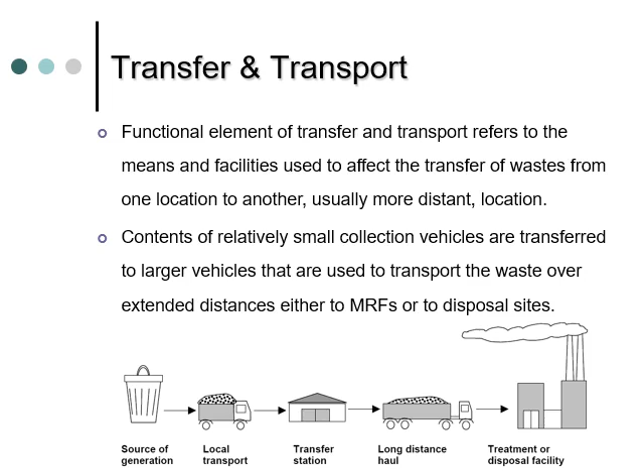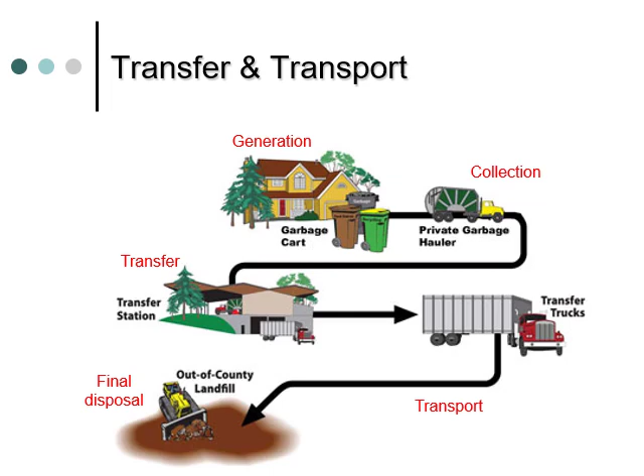In the slide, you see a flow diagram showing the elements of integrated solid waste management system. As you see here, the transfer and transport operations are between the collection and final disposal steps. Transfer and transport operations are also used in conjunction with material recovery facilities to transport recovered materials to markets or waste-to-energy facilities and to transport residual materials to landfills.

Today, with rising labor, operating and fuel costs, and the absence of nearby solid waste disposal sites, transfer stations are becoming common.

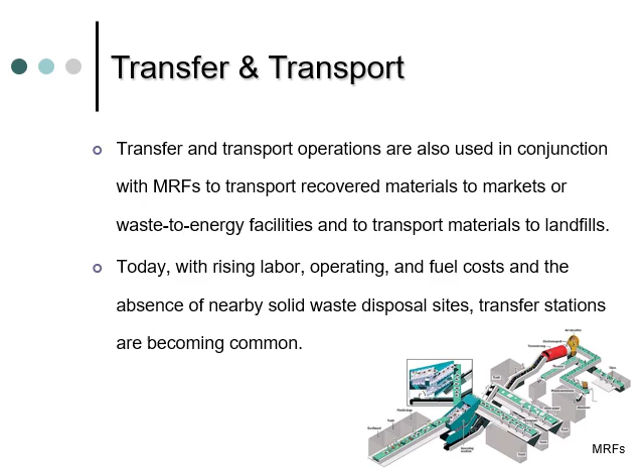Now let's try to find the answer of the question, why do we need for transfer operations? Transfer and transport operations become a necessity when haul distances to available processing centers or disposal sites increase, so that direct hauling is no longer economically feasible. They also become a necessity when processing centers or disposal sites are sited in remote locations and cannot be reached directly by highway.

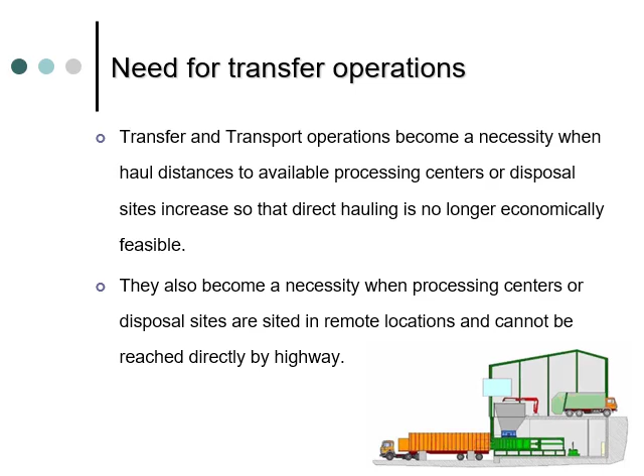Now let me tell you some of the factors that tend to make the use of transfer operations attractive. Occurrence of illegal dumping due to excessive haul distances, location of disposal sites relatively far from collection routes, use of small capacity collection vehicles, existence of low-density residential service areas, use of a hauled container system with relatively small containers for collection of waste from commercial sources, and use of hydraulic or pneumatic collection systems.

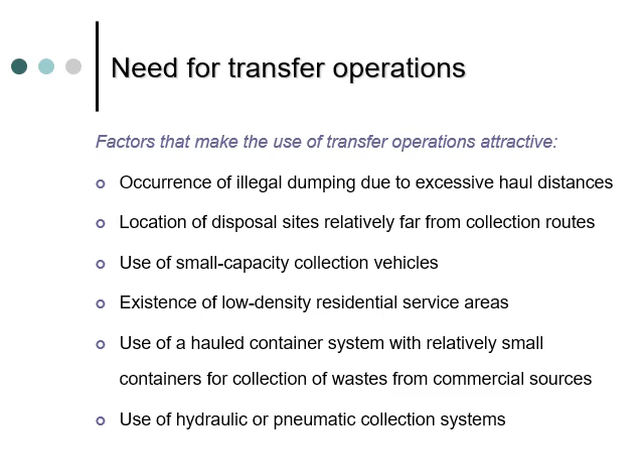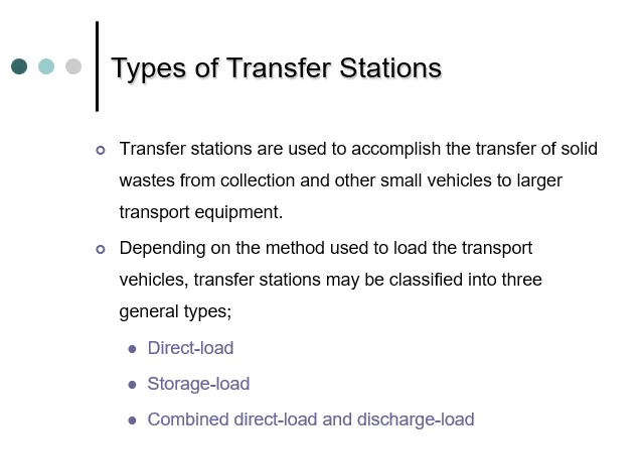Transfer stations are used to accomplish transfer of solid waste from collection and other small vehicles to larger transport equipment. Depending on the method used to load the transport vehicles, transfer stations may be classified into three general types. The first type is direct load, the second one is storage load, and the last one is the combined direct load and discharge load.

In some cases, the waste may be emptied onto an unloading platform and then pushed into the transfer vehicles after recyclable materials have been removed. The volume of waste that can be stored temporarily on the unloading platform is often defined as the surge capacity or the emergency storage capacity of the station.

In the storage load transfer station, waste are emptied directly into a storage pit from which they are loaded into transport vehicles by various types of auxiliary equipment. The difference between a direct load and a storage load transfer station is that the latter is designed with a capacity to store waste, typically 1 to 3 days.

In some transfer stations, both direct load and discharge load methods are used. Usually, these are multi-purpose facilities that service a broader range of users than a single-purpose facility. A multi-purpose transfer station can also house a materials recovery operation.

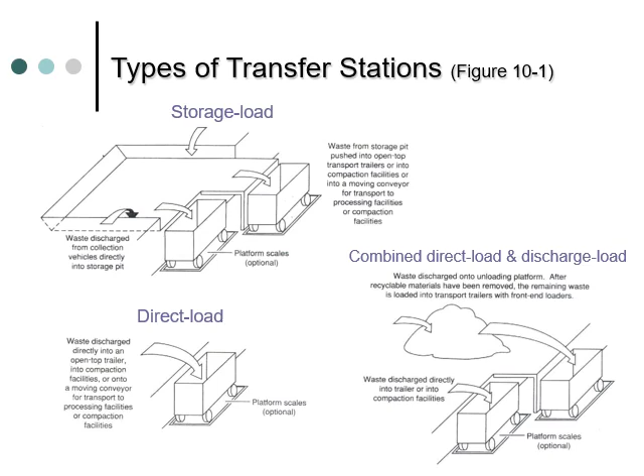In a large capacity direct load transfer station, the wastes in the collection vehicles usually are emptied directly into the transport vehicle. To accomplish this, these transfer stations usually are constructed in a two-level arrangement. The unloading dock or platform from which the waste from collection vehicles are discharged into the transport trailers can be elevated, or the transport trailers can be located in a depressed ramp.

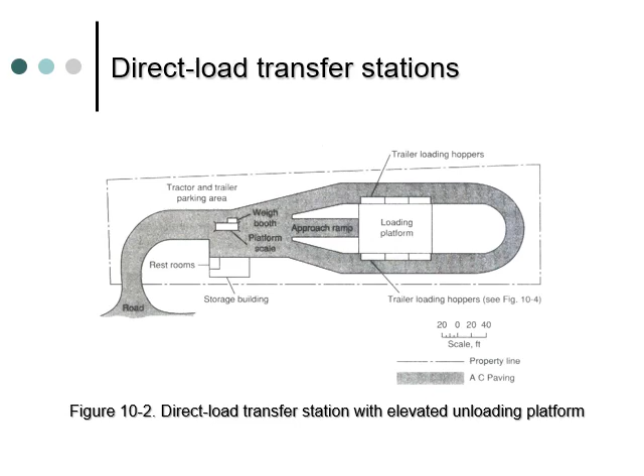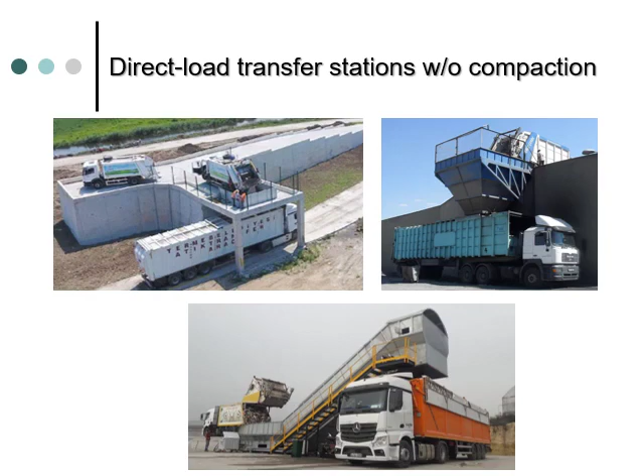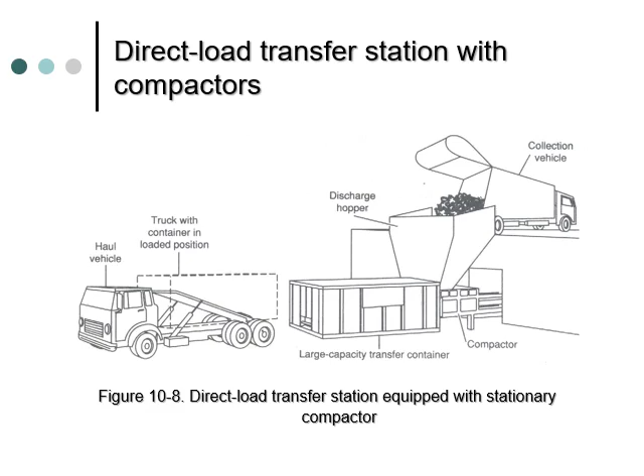A small capacity direct load transfer station with compaction facilities is shown. A large container is used with this type of transfer station, as opposed to a transfer trailer. The container is hauled to the disposal site using a tilt frame vehicle. Depending on the length of time required to haul the loaded container and return, an empty container may be attached to the compactor before the full container is hauled away.

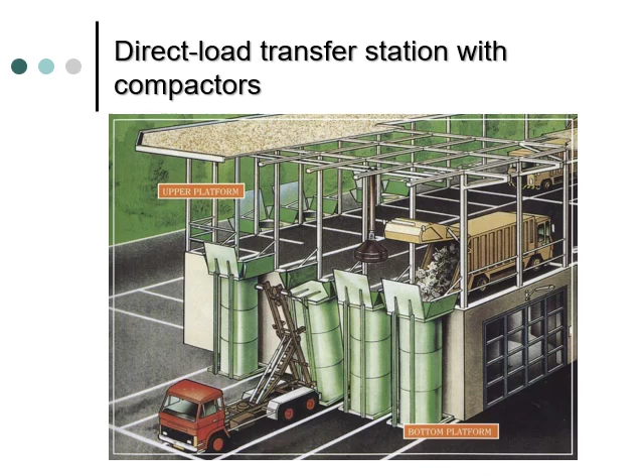In the slide, you can see an example of large capacity direct load transfer stations with compactors. The compaction facilities can be used to compact waste directly into the transfer trailers. The operation is essentially the same as a direct load transfer station with open trailers, except that waste is compacted into large transfer trailers using stationary compactors. In some cases, the waste is conveyed to the compaction facilities.

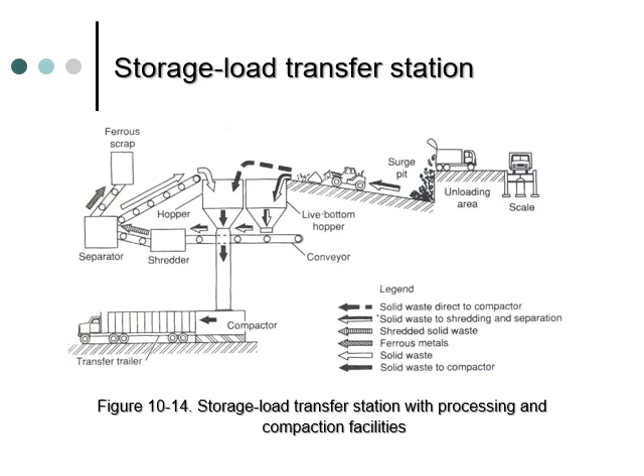Now let me talk about transport means and methods. Motor vehicles, railroads, and ocean-going vessels are the principal means now used to transport solid wastes. Pneumatic and hydraulic systems have also been used. Where the point of final disposition can be reached by motor vehicles, the most common means to transport solid waste from transfer stations are trailers, semi-trailers, and compactors. All types of vehicles can be used in conjunction with other types of transfer stations.

In general, vehicles used for hauling on highways should satisfy the following requirements: waste must be transported at minimum cost, waste must be covered during the whole operation, vehicles must be designed for highway traffic, vehicle capacity must be such that allowable weight limits are not exceeded, and methods used for unloading must be simple and dependable.

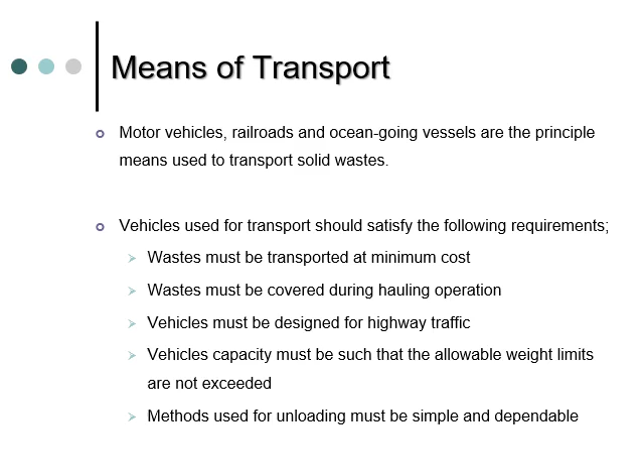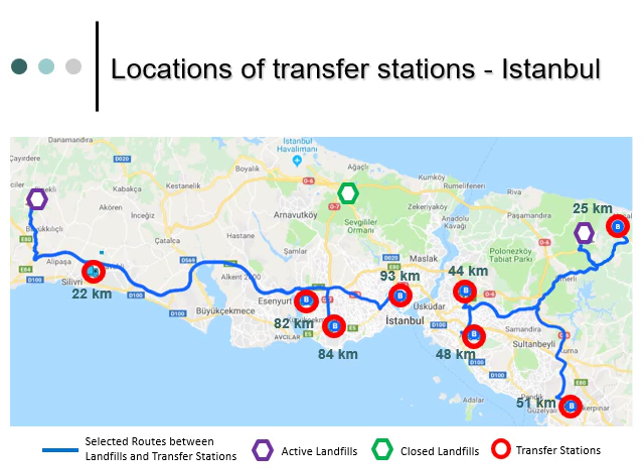There are two active municipal solid waste landfills. The one in the Anatolian side is Kömürcüoda landfill, and the other one in the European side is in Silivri. The landfill in Odayeri was closed after about 25 years of operation, following the construction of the new airport close to it, last year.

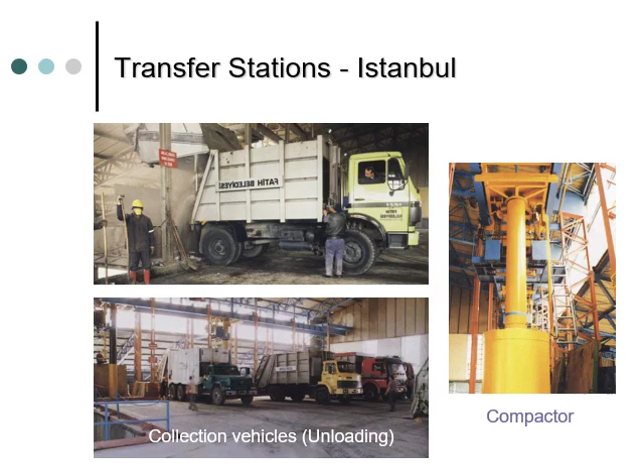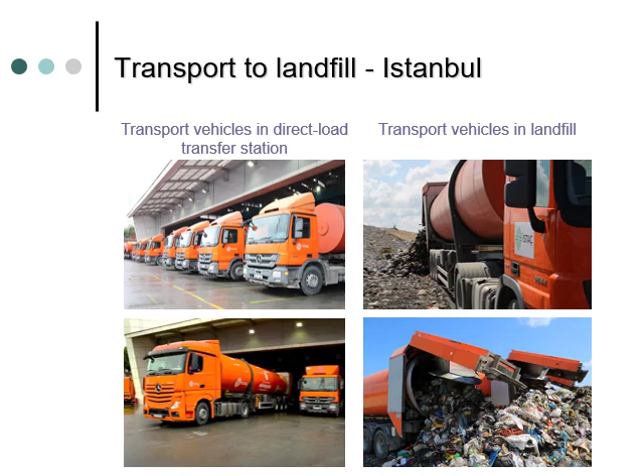Is a transfer station appropriate for your community? This is one of the crucial questions that local authorities look for, and the answer can only be given by comparing the costs and savings associated with the construction and operation of the transfer station. By the way, the benefits and possible drawbacks should also be considered.

What are the expected benefits? Lower collection costs, reduced fuel and maintenance costs for collection vehicles, increased flexibility in selecting disposal facilities, the option to separate and recover recyclables or compostables at the transfer site, and the opportunity to shred or bale wastes before disposal.

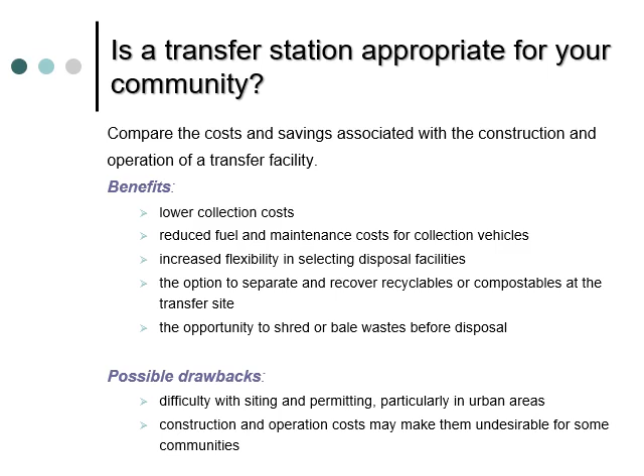What about the possible drawbacks? Difficulty with siting and permitting, particularly in urban areas, and construction and operation costs may make them undesirable for some communities.

Although specific details vary with size, important factors that must be considered in the design of transfer stations include the type of transfer operation to be used, storage and throughput capacity requirements, equipment and accessory requirements, and sanitation requirements.

From a design standpoint, the key issue is whether waste recovery operations will be incorporated into the transfer station facility. If waste recovery is to be accomplished at the transfer station, then an adequate area must be available for the collection vehicles to unload.

Both the throughput and storage capacity requirements must be evaluated carefully in planning and designing transfer facilities. The throughput capacity of a transfer station must be such that the collection vehicles do not have to wait too long to unload. In most cases, it will not be cost-effective to design the station to handle the ultimate peak number of hourly loads. Ideally, an economic trade-off analysis should be made.

For example, for both types of transfer stations, the annual cost of the time spent by collection vehicles waiting to unload must be traded off against the incremental annual cost of a transfer station and/or the use of more transport equipment.

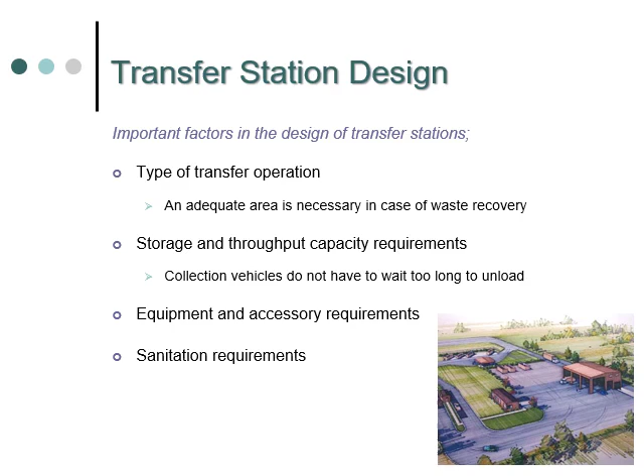Whenever possible, transfer stations should be located as near as possible to the weight center of the individual solid waste production areas to be served, within easy access of major arterial highway routes as well as near secondary or supplemental means of transportation, where there will be a minimum of public and environmental objection to the transfer operations.

Construction and operation will be most economical. Additionally, if the transfer station site is to be used for processing operations involving materials recovery and/or energy production, the requirements for those operations must also be assessed. In some cases, these latter requirements may be controlling.

Under ideal conditions, the transfer stations should be located so as to minimize transportation costs. However, given the difficulty most waste management agencies have had in recent times in locating transfer stations, transportation costs have become somewhat less important in the selection of an appropriate location of a transfer station.

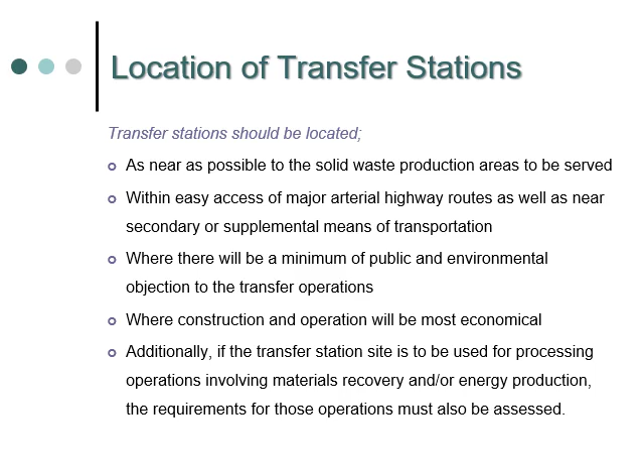Hereafter, I will talk about the solution of 3 examples about transfer and transport operations from our textbook. The first example is about the economic comparison of transport alternatives.

The question asks to determine, based on operating cost, the break-even points for a hauled and a stationary container system as compared with a system using transfer and transport operations for transporting waste collected from a metropolitan area to a landfill disposal site. The following operating cost data are applicable.

Haul container system using a hoist truck with a 6 meter cube container is $25 per hour. Stationary container system using a 15 meter cube compactor is $40 per hour. Tractor unit with a capacity of 80 meter cube is $40 per hour.

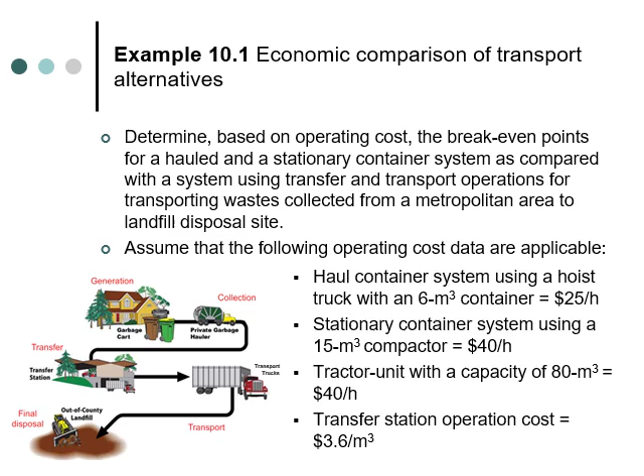Transfer station operating cost is $3.6 per meter cube. Here is the solution of this example.

First, let's convert the cost data to units of dollars per cubic meter per minute. For the hoist truck, it is calculated by dividing the cost data of the hoist truck, which is $25 per hour, by 6 meter cube, which is the capacity of the hoist container, and converting this value to minutes by dividing by 60 minutes per hour. The result is $0.0694 per meter cube per minute.

For the collection vehicle with compactor, it is calculated by dividing the cost data, which is $40 per hour, by 15 meter cube, the capacity of this vehicle, and converting this value to minutes by dividing by 60 minutes per hour. The result is $0.0444 per meter cube per minute.

Finally, the same calculation is done for the transport truck, by dividing the $40 per hour cost data by 80 meter cube, the capacity of this vehicle, and converting that data to minutes by dividing by 60 minutes per hour. The result is 0.0083 dollars per meter cube per minute.

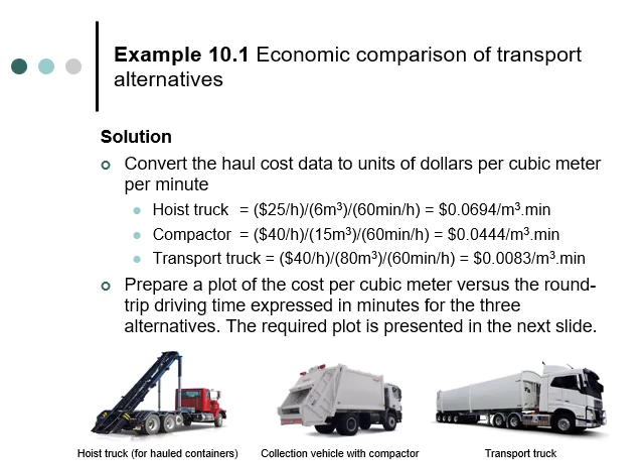Now let's prepare a plot of the cost per cubic meter versus the round-trip driving time expressed in minutes for the 3 alternatives using the values calculated above. The required plot is presented in the next slide.

Let me explain how these cost values are calculated.

For the 10-minute round-trip driving time to the disposal site, the cost of the hoist container system is 10 minutes times the unit cost of the hoist container system, which is $0.0694 per cubic meter per minute. It makes $0.694 per cubic meter.

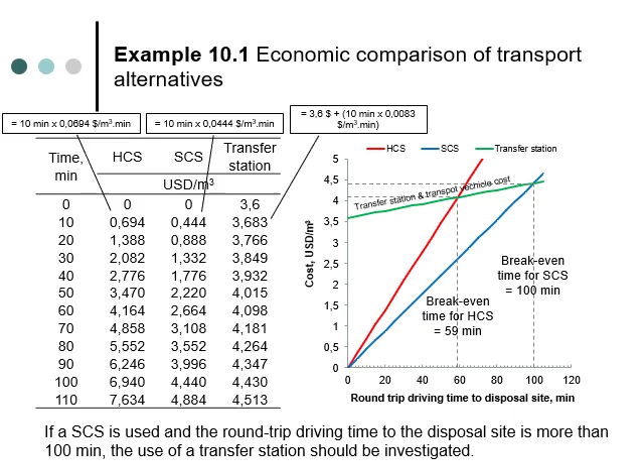Now let me solve a problem and show you how to determine the break-even times for a transfer and transport system using cost data expressed in terms of dollars per ton per minute.

In this problem, you are asked to determine the break-even times for the two container systems versus the use of a transfer and transport system. The computations have to be based on dollars per ton per minute. Assume that the following cost data are applicable.

There are two stationary container systems. The first one uses 4-ton capacity collection vehicles, and the second one uses 10-ton capacity collection vehicles. The operating cost of the 4-ton capacity vehicle-based stationary container system is $25 per hour, and the operating cost of the 10-ton capacity vehicle-based stationary container system is $36 per hour.

For transportation of the municipal solid waste to the landfill, a 25-ton capacity truck semi-trailer is used, and its cost is $55 per hour. Finally, the operating cost of the transfer station is assumed to be $3 per ton of municipal solid waste.

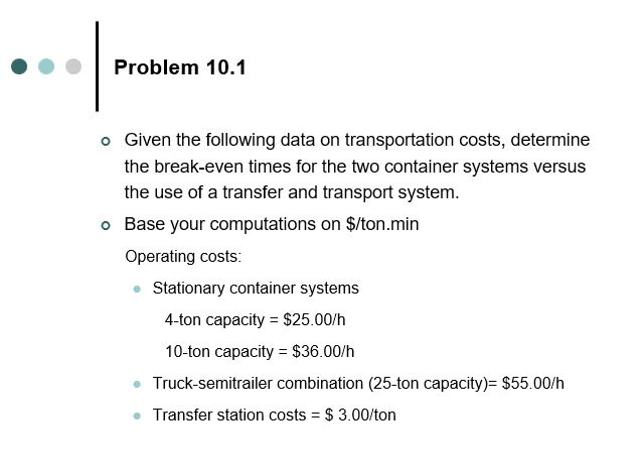Here is the solution of this problem. First of all, let's convert all the cost data in dollars per hour to dollars per ton per minute.

The haul cost of the 4-ton capacity vehicle-based stationary container system is $25 per hour divided by 4 tons and divided by 1 hour over 60 minutes, and it is equal to $0.104 per ton per minute.

The direct haul cost of the 10-ton capacity vehicle-based stationary container system is $36 per hour divided by 10 tons divided by 1 hour over 60 minutes, and it is equal to $0.060 per ton per minute.

The transport cost of the truck semi-trailer is $55 per hour divided by 25 tons divided by 1 hour over 60 minutes, and it is equal to $0.0367 per ton per minute.

The transport truck semi-trailer is used in combination with the transfer station. So the baseline cost of this combination, which is at round-trip time 0, is $3 per ton.

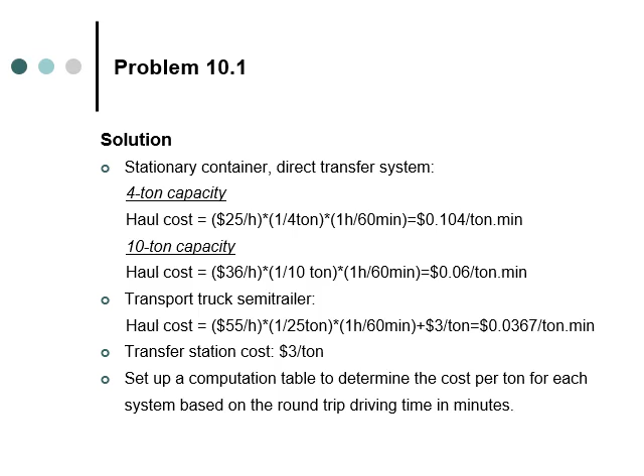Let me explain how the values in the second row, which is 20-minute round-trip driving time, are calculated. For the 4-ton capacity collection vehicle, it is 20 minutes times $0.104 per ton per minute, which is the unit cost of the 4-ton capacity vehicle, and it makes $2.08 per ton.

For the 10-ton capacity collection vehicle, it is 20 minutes times $0.060 per ton per minute, which is the unit cost of the 10-ton capacity vehicle, and it makes $1.2 per ton.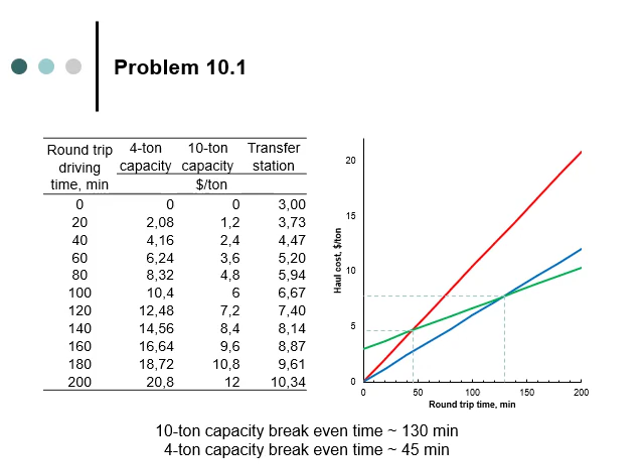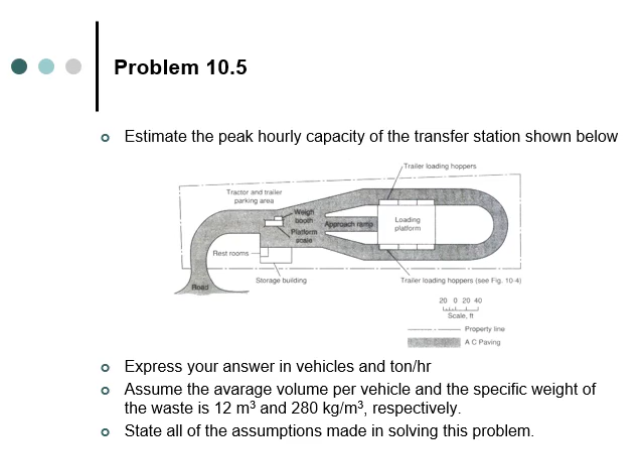This is the solution of problem 10.5. Let's start with stating the assumptions made. This transfer station is a direct load station; therefore municipal solid waste will not be stored on the platform.

In the elevated unloading platform, 6 collection vehicles can unload at the same time, one per trailer hopper. The total time required to get a collection vehicle unloaded, including the time spent driving onto the unloading platform, unloading and driving off the platform, and the time needed to clear the platform between collection vehicles, is 10 minutes.

The maximum number of collection vehicles that can be handled per hour is calculated by dividing 60 minutes per hour by 10 minutes per cycle, which is the third assumption, and 6 trucks per cycle, which is the second assumption. It is computed as 36 collection vehicles per hour.

The peak capacity of the transfer station, expressed in ton per hour, is estimated by multiplying the maximum number of vehicles per hour, which is 36, by 12 meter cube per vehicle, the average volume of the collection vehicle, and 280 kg per meter cube, the specific weight of the solid waste. The result is divided by 1000 to convert it to ton per hour. The result is 121 tons per hour.